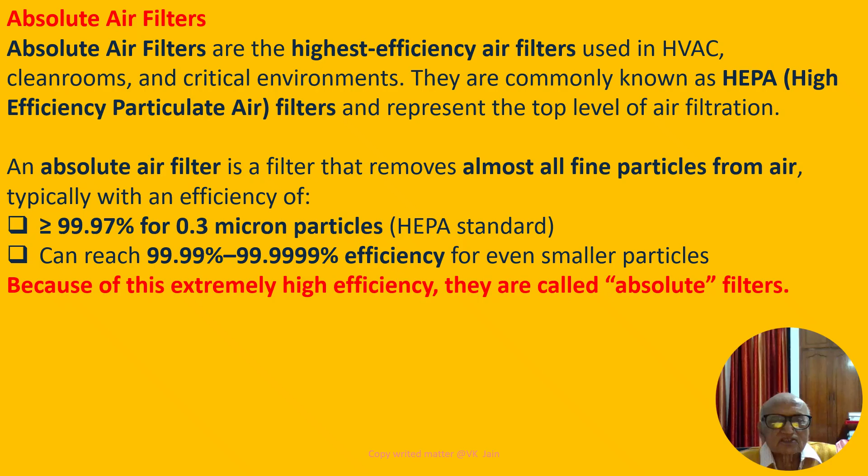Friends, the advantages of using HEPA filters are that they have extremely high filtration efficiency. They remove bacteria, viruses, dust, and allergens. Also, they are essential for critical environments.

Friends, on the limitation side, they have a very high pressure drop. As such, they need strong fans for flowing the air in the duct. Second, they cannot handle wet or heavy dust load. They are not washable. Replacement is required after use. They require pre-filters to increase the life.

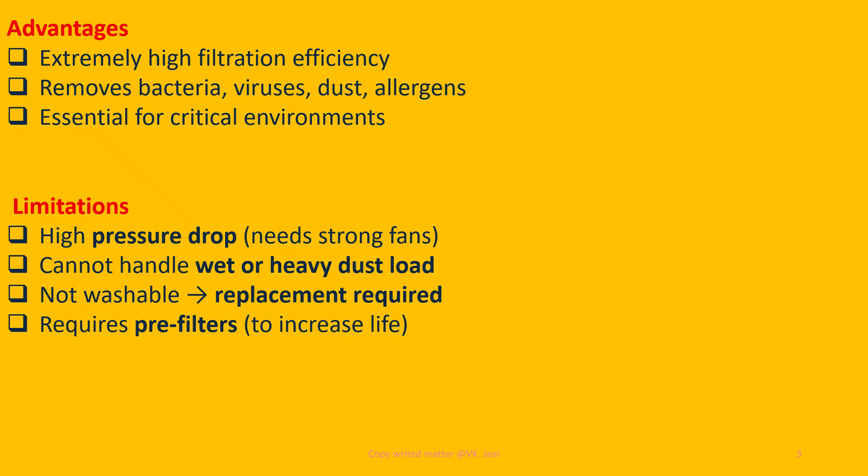Friends, now we are discussing ASHRAE, American Society of Heating, Refrigerating and Air-Conditioning Engineers, HVAC filtration standards. The American Society of Heating, Refrigerating and Air-Conditioning Engineers, known as ASHRAE, and we have a counterpart in India also, known as ISHRAE, has developed an HVAC filter test standard to quantify the efficiency of filters.

The ASHRAE 52.2 standard of 1999 measures the fractional particle size efficiency of an HVAC filter. This indicates the filter's ability to remove airborne particles of differing sizes between 0.3 and 10 micron in diameter. A minimum efficiency reporting value, known as MERV, is assigned to a filter depending upon the PSE in three different particle size ranges: 0.3 to 1 micron, 1 to 3 micron, and 3 to 10 microns.

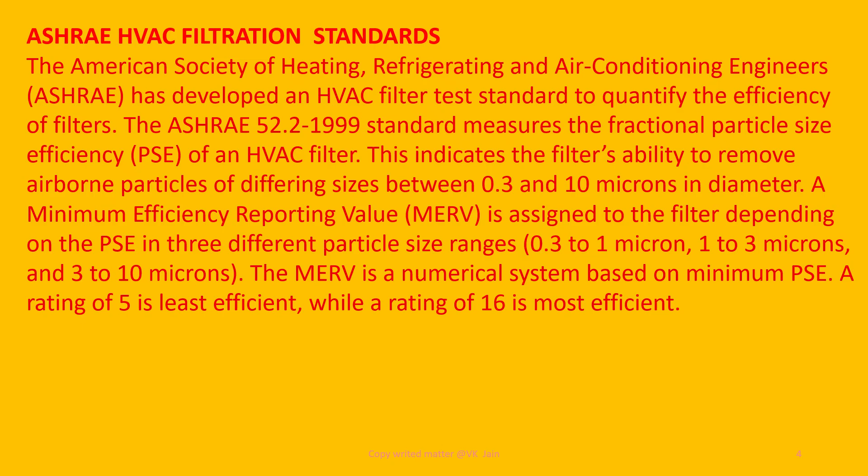The MERV is a numerical system based on minimum PSE. PSE means particle size efficiency. A rating of 5 is least efficient, while a rating of 16 is most efficient.

Friends, pardon me, I forgot to start my presentation from this slide. Anyhow, I am taking now what is filtration.

Control of air purity, one of the functions included in the broad definition of air conditioning, consists of reducing or eliminating unwanted particulate or gaseous matter from the air supplied to the conditioned space. The contaminants may be carried to cleaning equipment in the ventilation air from outside or in recirculated air from the space being treated. Efficient air filtration is of special importance in urban areas where damage is likely to be caused to decorations and fittings by airborne dust particles.

Fresh or returned air is always filtered before conditioning. This is done to remove the solid suspended impurities from the air, such as dust, smoke, fiber, germs, microbes, by allowing the air to pass through a filter or bank of filters, having filter media of felt, straw, jute, fibers, expanded metal, mesh, glass microfibers, paper, or fiberglass.

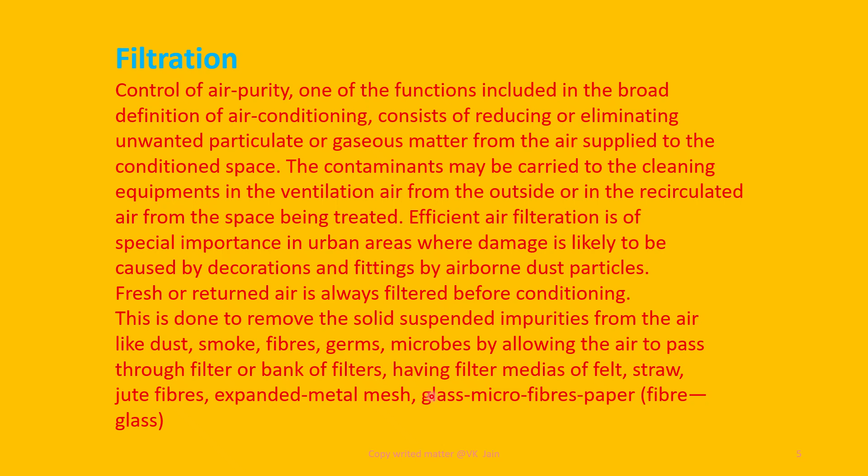Friends, now we discuss types of filters available. The first category is dry strainer filters, having subcategories as dry fabric type, high density polyethylene, pleated synthetic filters, or absolute glass microfiber paper type, which may be fireproof and fire resistant as well. Then the second category is impingement filters, known as viscous type, oil wetted fabric type, 6 or 3 ply, or metal viscous.

Friends, let me tell you that I had been in charge of Safdarjung Hospital as executive engineer for a continuous 5 years starting from 1995, and in those days we were using metal viscous filters as pre-filters in operation theatres. The third category is electrostatic type, and fourth is air washers and scrubbers.

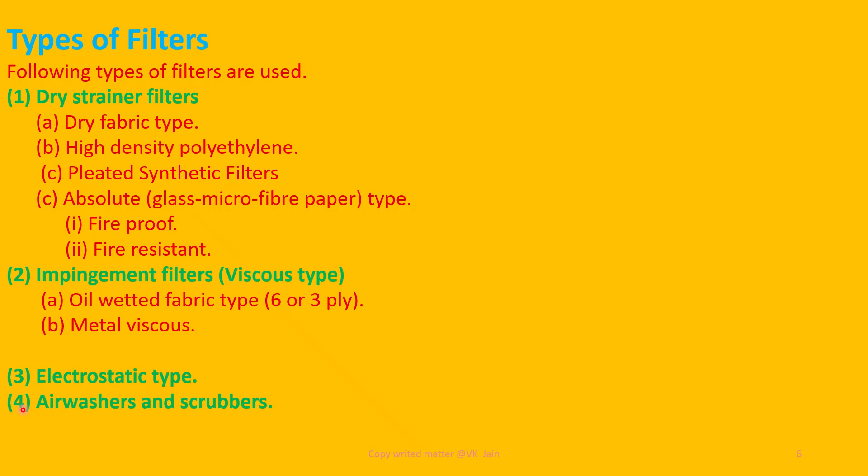Friends, now we are taking up dry fabric strainer filter, of which photograph is attached at the bottom. They have collecting surfaces made of cellulose, cloth, felt, glass fibers, or similar material. Their effectiveness in removing impurities depends upon the physical properties of the medium used.

One of the features of dry type filter is that by periodic cleaning it is possible to prolong the life of the medium. A further advantage of dry filter is that it can be located near heating coils since its performance remains unaffected by heat. The air velocity through the filter varies from 3 to 15 meters per minute, and resistance is of the order of 2.5 mm of water gauge for clean filter type.

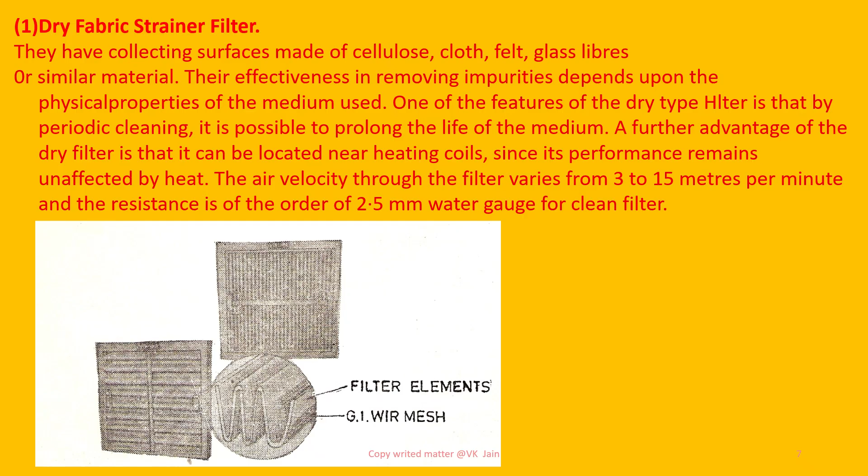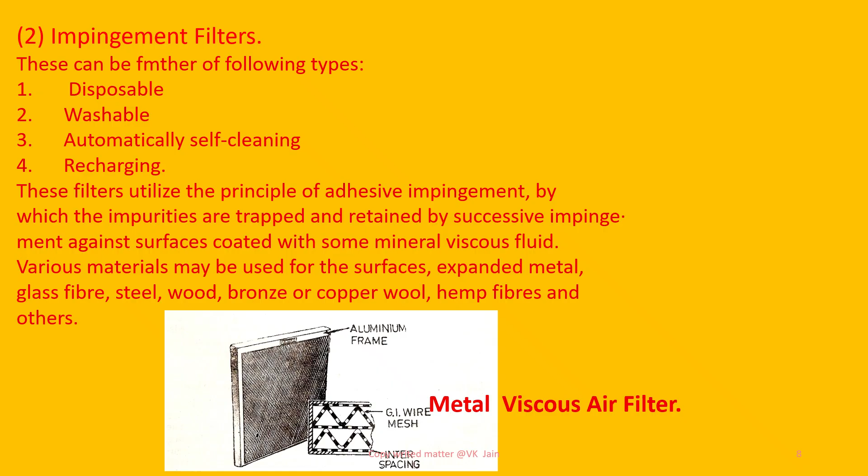Friends, now we are discussing advanced pleated synthetic filter media. Pleated air filters used in HVAC systems are made with a wide range of filter media, including fiberglass, polyester, paper, and synthetic non-woven material. Recent advancement in non-woven technologies have allowed for improvement in both performance and value of synthetic filter media over the standard cotton poly blend used for years in HVAC filters.

Unlike traditional cotton or poly media, the synthetic filter media is more modern. Filters can be made of thermally bonded, continuous, hydrophobic, that means moisture repelling, polyolefin fibers that resist shedding and don't absorb moisture. This is important in resisting bacterial growth, and it keeps fibers from getting into HVAC coils or into airspace of the building.

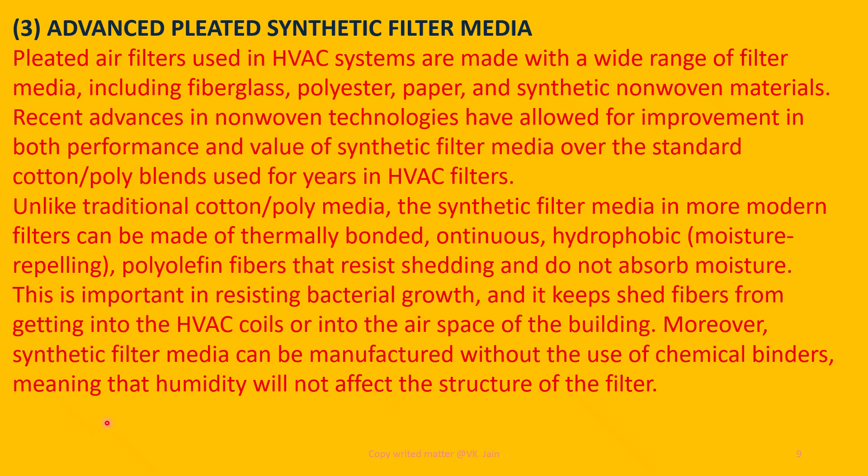Moreover, synthetic filter media can be manufactured without the use of chemical binders, meaning that humidity will not affect the structure of the filter.

Friends, welcome back to Absolute Air Filter. Absolute air filters are the highest efficiency air filters used in HVAC, clean rooms and critical environments. They are commonly known as HEPA filters and represent the top level of filtration. We have done already.

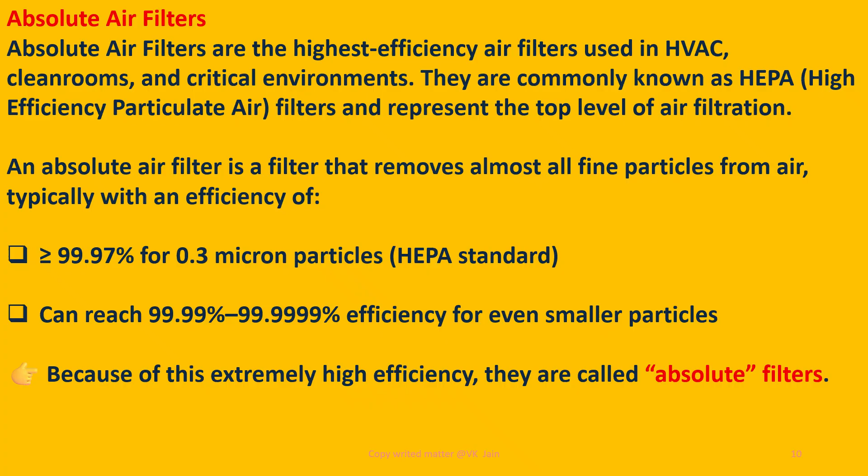Friends, here we will discuss key characteristics and performance of HEPA filters. Efficiency under EN 1822 standards, European standards. These filters, classes E10 to U16, provide extremely high dust removal, such as 99.97% or higher for 0.3 micrometer particles, HEPA.

Second is absolute versus nominal. Unlike nominal filters, which offer an approximate removal rate of 90%, absolute filters are certified to stop almost 100% of particles larger than the rated pore size. Next characteristic feature is media and construction. Commonly made from fiberglass or PTFE, pleated in aluminum, steel or wooden frames.

Next is mechanism. They operate through sieve action, collision and diffusion, and collecting particles at the surface, which allow them to capture extremely small particles, including bacteria and sub-micron dust.

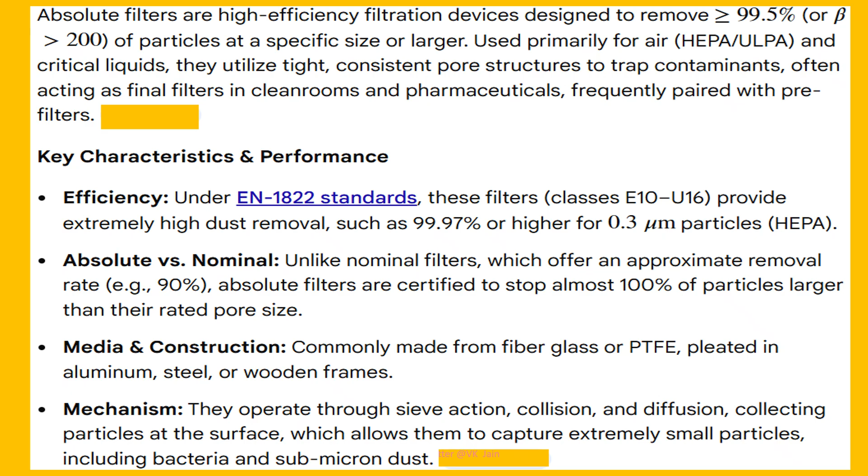Friends, absolute filters are used where high purity is critical in clean rooms and operating theaters to ensure sterile air. Second, industry. In pharmaceutical industry, food and beverages, and microelectronics industries. Third, compressed air for removing contaminants that damage sensitive components.

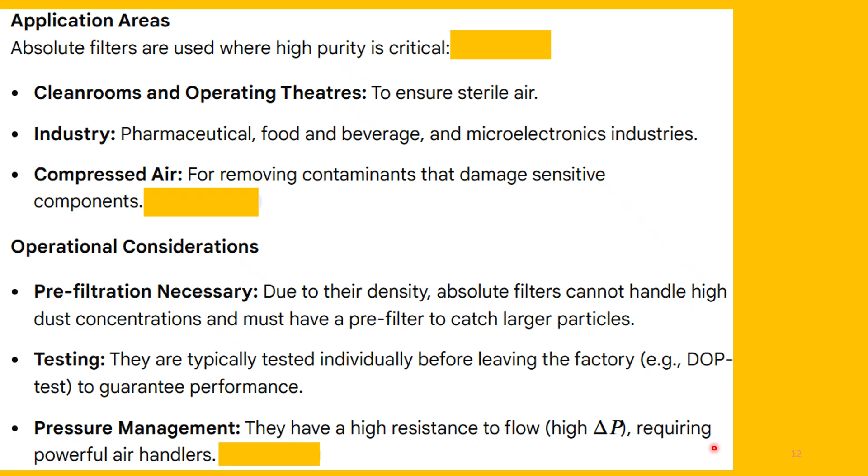Operational considerations. Pre-filtration is necessary due to their density. Absolute filter cannot handle high dust concentration and must have a pre-filter to catch larger particles. Testing. They are typically tested individually before leaving the factory, e.g. DOP test to guarantee performance. Next, pressure management. They have a high resistance to flow, high delta P, requiring powerful air handlers.